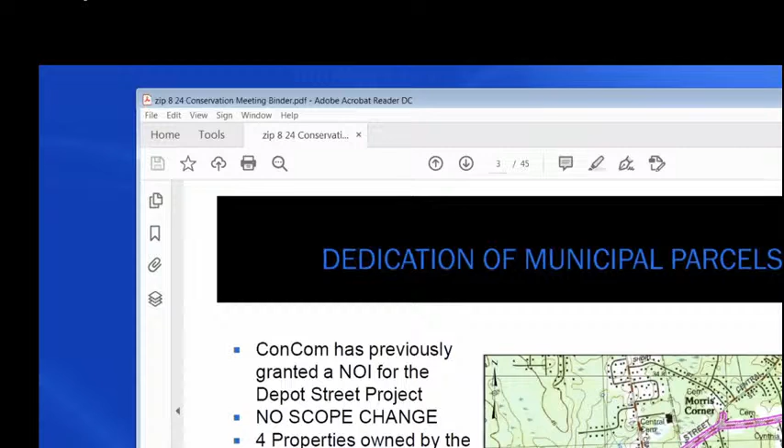The dedication of municipal parcels is our equivalent of an easement. The town can't take an easement from itself. But what we can do is the Conservation Commission is in control of 4 parcels: 288 Depot Street, 450 Depot Street, 470 Depot Street, and 9R Blackbrook Road, which are under conservation control. They're owned by the town, but controlled by the Conservation Commission. And all we're asking Concom tonight is to vote to allow Andrea to sign the dedication of municipal parcels so we can get this recorded at the Registry of Deeds to allow the project to go forward.

This is a requirement by Mass DOT. This is what Town Counsel recommended to fill this particular gap. There was some dispute between DOT and Town Counsel that the town can't grant itself its own easement for its own property. But what we can do is dedicate the municipal parcels. These properties only have temporary easements, except for one which has a utility going through it - it's going to go back to what it was beforehand. It's a paperwork issue for the Registry of Deeds, so we can record that we're doing the work there.

So if everyone recalls, as Greg pointed out, we issued a notice of intent, and there was some discussion of even restoration work being done on one of the properties. There's a head wall to a drainage conduit there. So I think we probably already agreed to all this work being done, and now we're just giving the town permission to do it on land that's under our management. Correct. Any comments, questions from anybody?

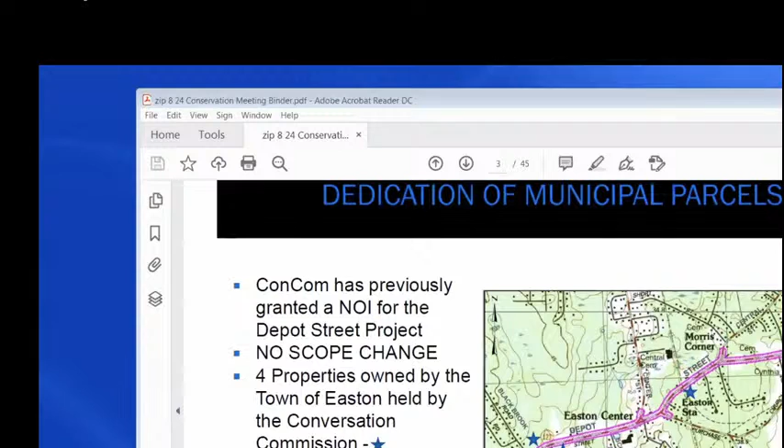Okay, I make a motion to issue - what's it called - dedication of municipal parcels as noted in the document presented in the packet. Thomas, second. Roll call vote. Kallfelz, aye. Lundeen, aye. Spadea, aye. Thomas, aye.

Just before we go on, I neglected to see if there was any public comment on this. So I do want to give people a chance. If you have a public comment, you can either post it in the Q&A section or raise your hand, and we'll give you a few moments to do that.

Okay, seeing no questions, we'll just move along here.

Greg, while we had you here, there was a discussion that's actually going to come up a little bit later in our next two hearings related to sewer easements in the Five Corners District. And there was some discussion about potentially granting you some control over normal sewer connections like the one we're doing here that are in the middle of asphalt roadway, so that you might oversee that rather than have them come before us in each individual case. Is that something you'd be open to requesting an RDA for, to cover the whole district and leave it up to your discretion - to say, well, this one's going through lawn that's right next to a pond or something, that might not be something I'm comfortable okaying - but is that something you've thought about?

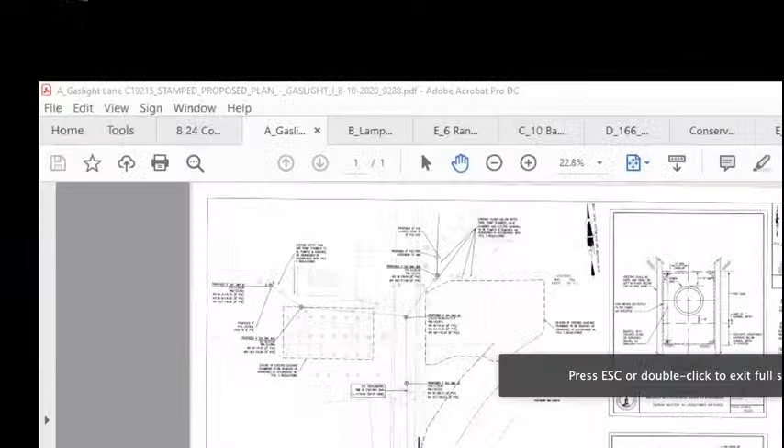Andrea, could you make me a co-host so that I can share my screen? Oh, I would love to. You are so good at that. And when I share my screen, I don't see the panel, I don't see the attendees, and I'm waiting for our favorite former chairman. Okay, I will try and keep an eye on that as well.

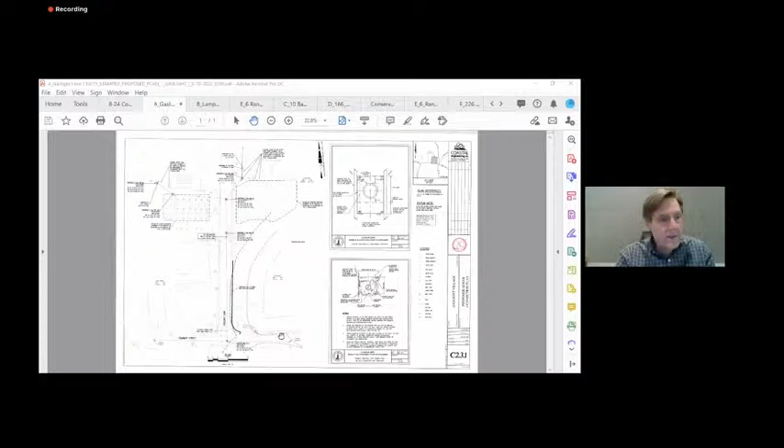Next up is 1 to 106 Gaslight Lane. This is the Gaslight Village condominium complex. Who is here for that? Please raise your hand. It's Sean Riley. Okay, I'm moving him up.

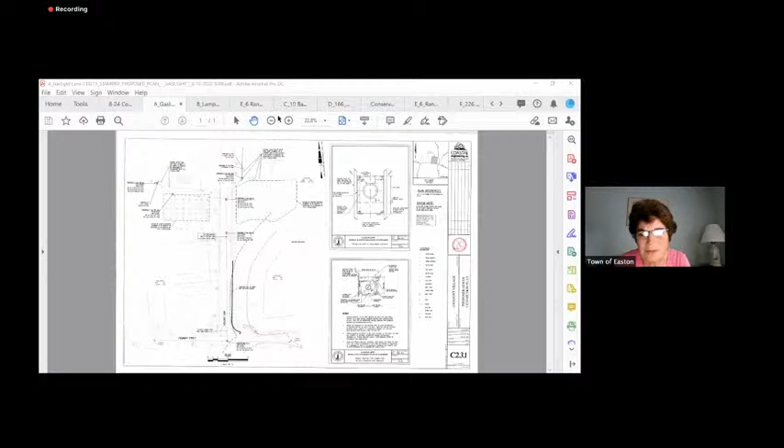Okay Sean, you're up. Oh, you're muted. Unmute yourself, Sean. There we go. Yep, all right. For the record, Sean Riley with Coastal Engineering, representing the applicant on what we feel is a pretty straightforward project.

Good segue into this. The sewer is going right down the middle of Gaslight Lane. The only real work that we're doing within any of the buffers is within the 200 feet of the riverfront for approximately the last 40 feet. You can see that we're just outside of the 100-foot buffer for the line that's running down the middle of the road. We are going to install a silt fence along the edge of the roadway. It should only take less than a week to do that section of work that runs along the buffer zone. I know you have a long agenda, so I'll open it up to any questions.

I was out at the site. It's a very level site. It does drop off the roadway about 20 feet, but by that point, it's beyond the erosion control. So I think this is a pretty straightforward approach here.

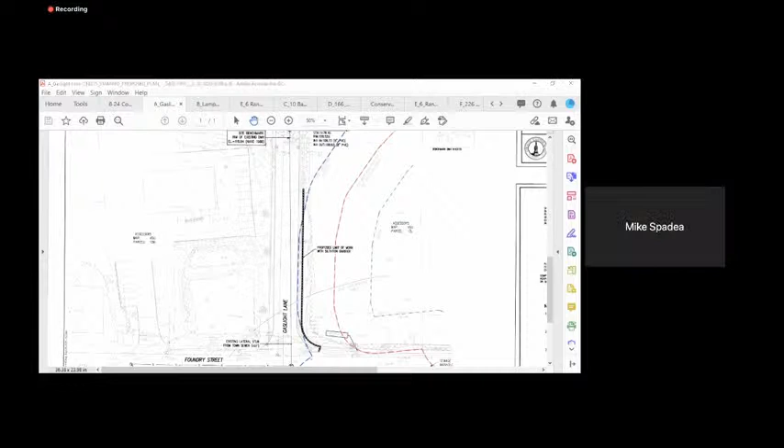Sean, this is Carol, what could go wrong? Really, if you've been down Foundry Street, they just installed the main all the way down Foundry Street, and there really isn't a whole lot that can go wrong because we're in the pavement. And it's actually curb and gutter as well, so any sediment would stay within the roadway. We're going to have some catch basin protection with silt sacks in the basins. So there really isn't a whole lot that can go wrong.

Right, and are they on a schedule of getting cleaned out, those silt sacks? Yes, they will be. And again, the process should only take a couple of weeks to do the entire project, so we don't anticipate this being open very long. Sounds good, thank you.

I just want to clarify, Sean, when you say a couple weeks for the whole project, I believe you're talking about the south side of Foundry too, is that correct? That is correct. Okay, thank you, because the minutes should reflect that this side is probably going to take a week, and then the south side maybe another week. Right.

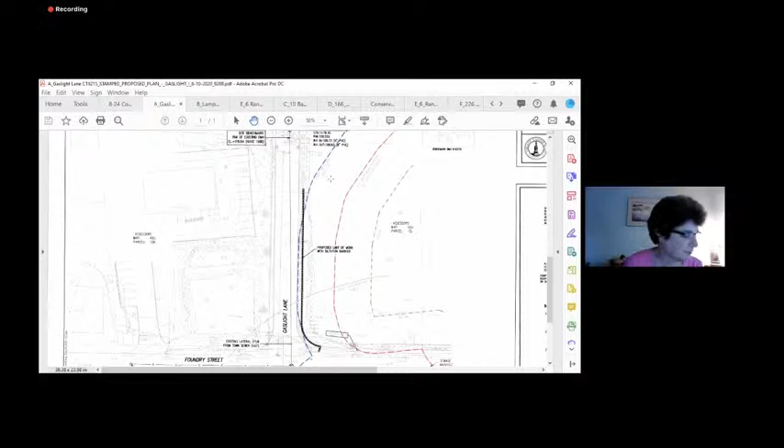Any other questions from the board? I agree, it looks straightforward to me. No comments from me either.

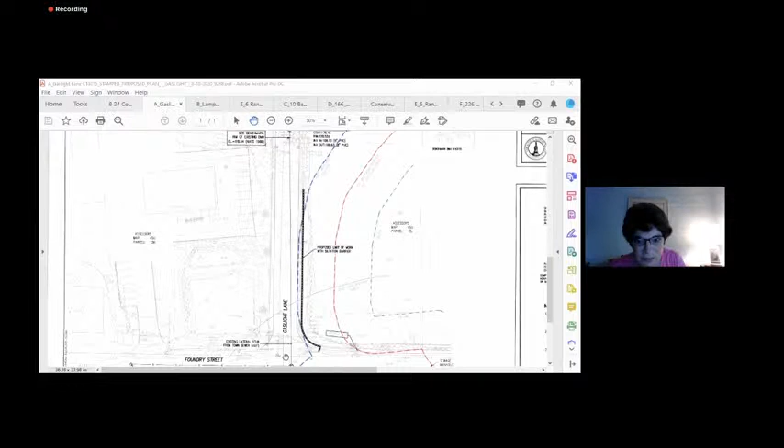Any comments from the public on 1 to 106 Gaslight Lane? Raise your hand, or if you have trouble finding how to raise your hand, send me a question. Okay, so seeing none,

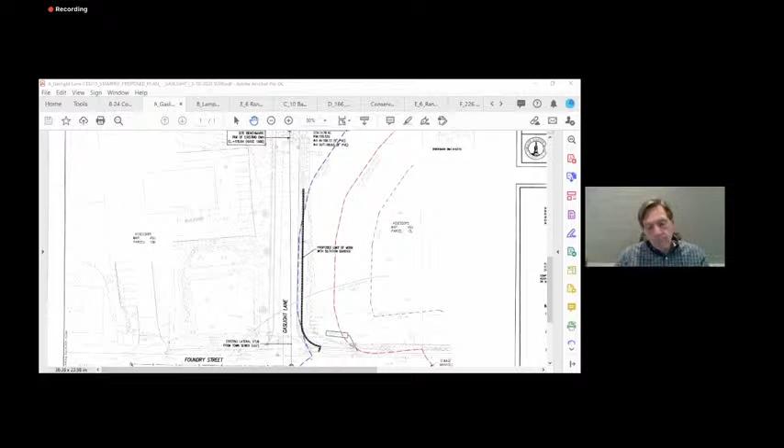I will make a motion to issue a negative RDA for 1 to 106 Gaslight Lane as proposed. Spady, a second. Roll call vote: Kallfelz, aye. Lundeen, aye. Spady, aye. Thomas, aye. Excellent.

So the next project up, is this you, Sean, as well? Yes, it is. This is 1 to 47 Lamplighter Lane. It's the development across the roadway, essentially, from the first project. So I assume we're in the same situation here. We are.

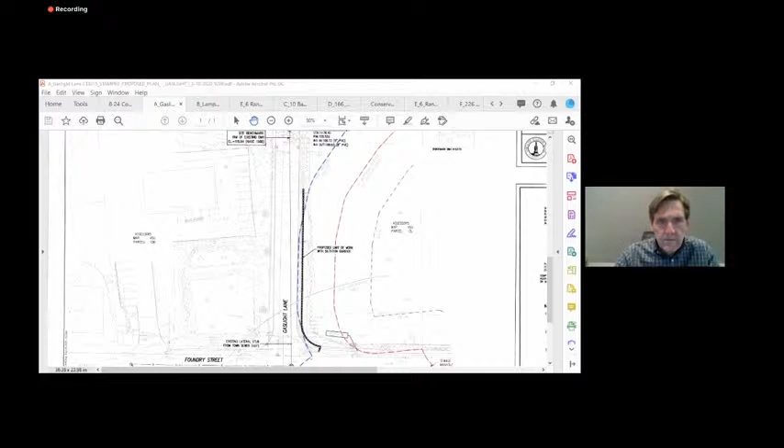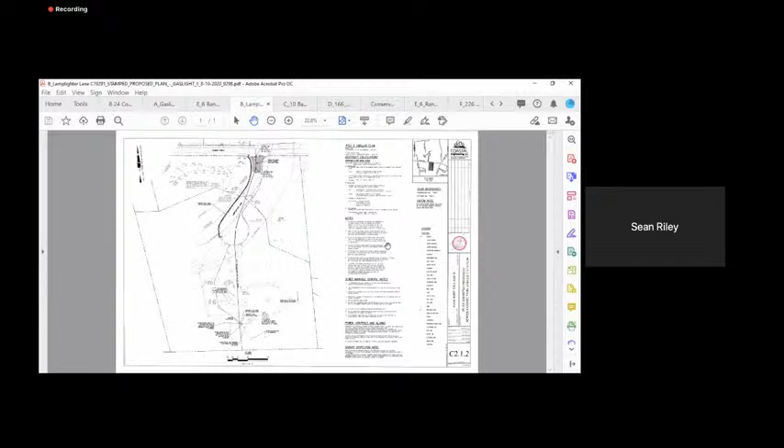Although this is a little more straightforward, in that we are proposing a lift station, and we'll be directionally drilling a 1.5-inch pipe from the lift station all the way to the termination point, which you'll see highlighted in gray at the top of the screen. That area highlighted in gray will be the area of excavation to the termination point where the force main will be directionally drilled to. There'll be a sewer manhole installed, and then the final connection out to Foundry. But the rest of the work is done underground with no open excavation.

The lift station is well outside of the buffer, and we didn't want to open everything up to lay this pipe all the way down and have to repave everything. So with only a 1.5-inch pipe, we figured we'd just directionally drill it from one end to the other.

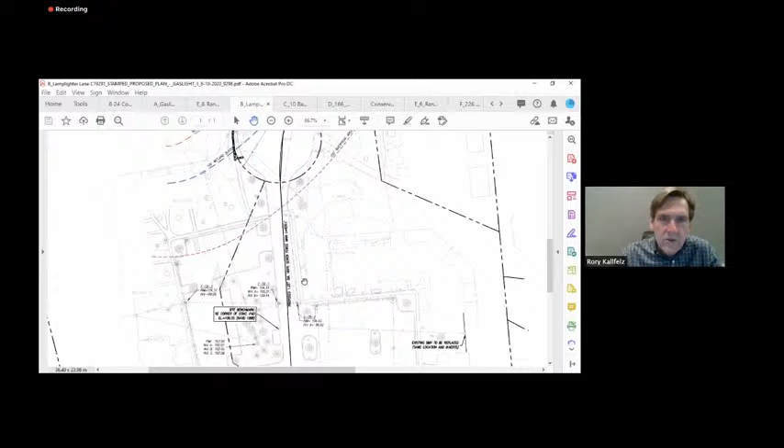So just to repeat, you're going to go all the way from the sewer inlet to the street? Yeah, all the way to that manhole. So they'll open up that area where that manhole is going. Yep, and that will be the receiving point that they'll push the directional drill through to, and then pull the pipe back through the excavation that the drill makes, all the way back to where the lift station is, down the bottom of the page.

So I'm going to anticipate Carol's question here. What could go wrong in the directional drilling, and what would you have to do to fix it at that point? Yep, so there are 4 or 5 crossings

that you see. There's catch basins a little bit lower, right in there. There's a couple catch basins with some drain pipes that we've gotten the inverts to, so we have a very good idea of where they are.

There's water crossings just below that, right? We're right below where it says Lamplighter Lane. Yeah, so we've got a crossing there, and then we've got a bit of an electric crossing, which all this is going to be dig-safed out. So those are really the only crossings we have in any proximity to the wetland resource area and the buffer zone.

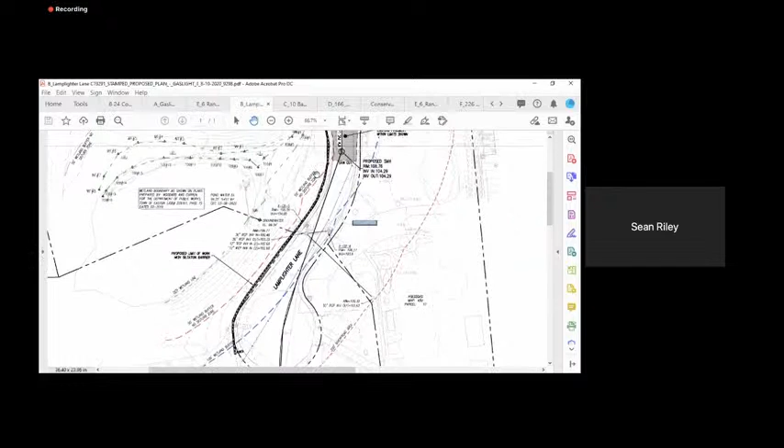Do you think you'd have to have additional erosion control, or sufficient erosion control, if you had to open up the roadway? No, we've carried the erosion control all the way down along the edge of the roadway and outside of the buffer, to accommodate any potential road openings we may need just to confirm the crossings.

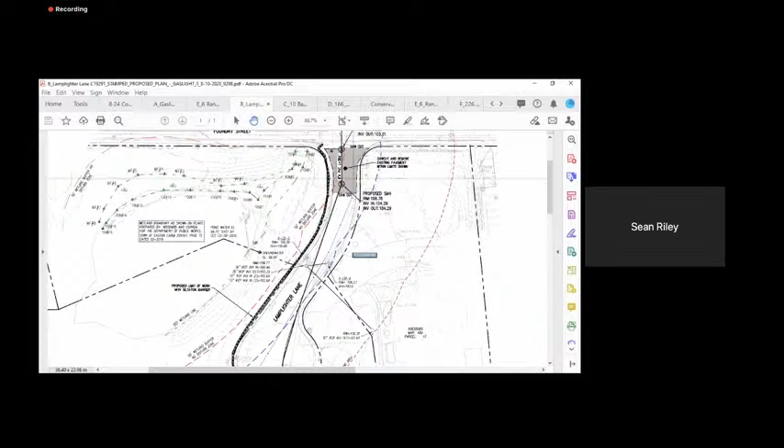So again, because it's in the roadway, I don't see that there's going to be any issues. Right, so my personal observation is, and you can see it by some of the topos here, it's relatively flat off the roadway, even into this no-disturb zone, about 10 or 15 feet. So I think with the erosion control right on the edge of the roadway, we're probably in good shape here.

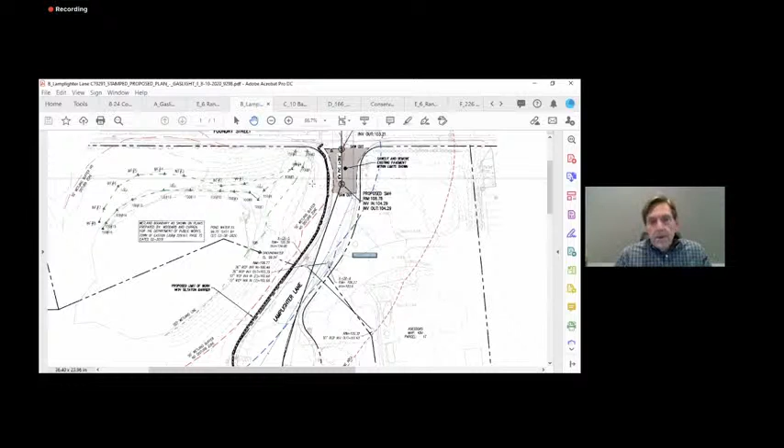Anybody on the board have any questions? Yeah, I do, this is Carol, Sean. I'm reminded the last couple of days we've had some pretty big downpours. The silt socks that are in the catch basins, do you wait until a good rain to remove those socks so you can be sure all material has washed off the road? How does that work?

So at the end of the day, they're closing up the work that they do, so really it would just be the width of the area they have open that would have any potential for silt runoff. With the timing of how long this opening would be, it's only going to be a few days that they'd have that open, and it's such a small area to maintain and oversee, so they would probably clean those out if there's any rain event.

So, okay, that sounds fine. Any other questions from the board?

I guess I have one question: when you do HDD, usually you want to do it straight, right? Yep. And it looks like we got somewhat of a bend over at the cul-de-sac. Is that correct? Yes, there is a bend, and I've already met with several contractors to see if they could accommodate that.

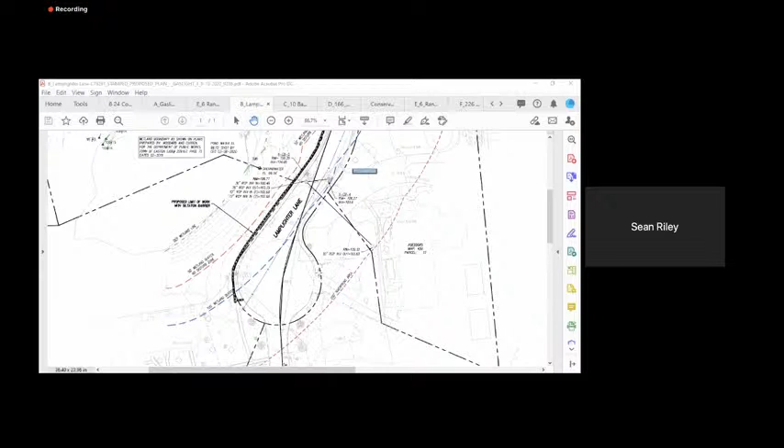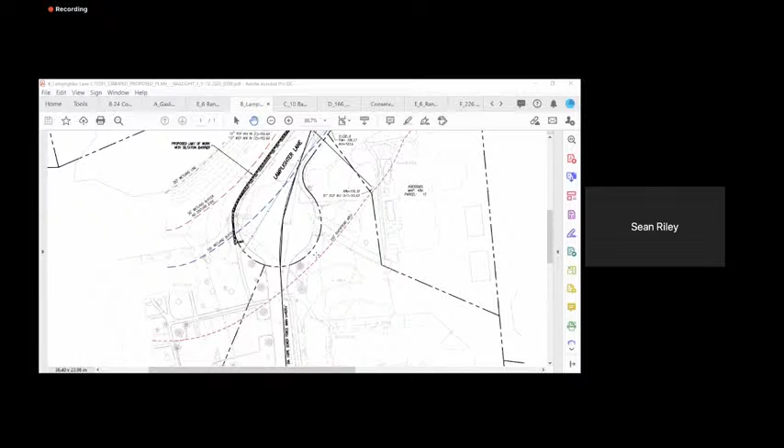Okay, and with only 1.5-inch pipe, they can bend it pretty good. Okay, and it's the flexible HDPE pipe that comes in the roll. Yep, so it's a continuous length of pipe with no fused sections.

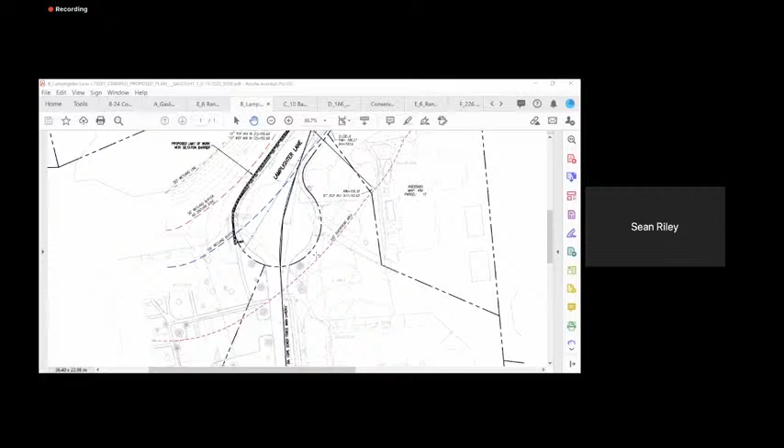Well, if they're confident they can pull it off, otherwise you might want to have a second backup plan for an entry and exit point. And if there was, it would probably be within the cul-de-sac point there. Right, that's all got erosion control. Off the side of the roadway. Yeah, that could be a contractor adjustment if they can't pull it off. Okay.

Just for the record, note that Stefan Cotino did join us in the last couple of minutes. Hey guys, sorry I'm late.

So is there any public comment? I'm sorry, any other board comment? Any public comment on 1 to 47 Lamplighter Lane? Okay, so seeing none,

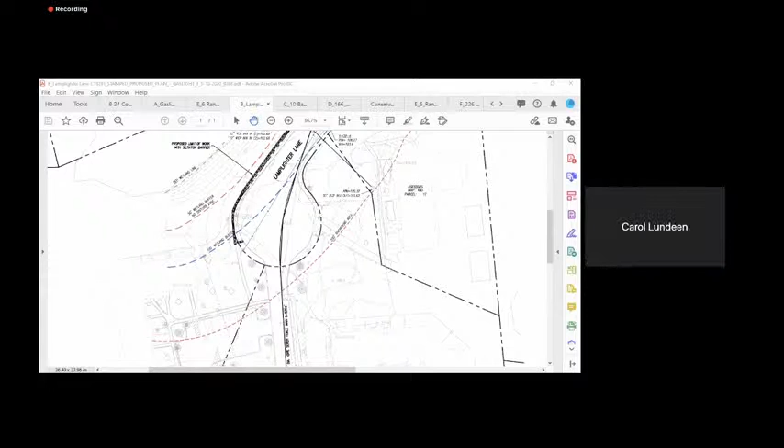I will make a motion to issue negative determination of applicability for 1 to 47 Lamplighter Lane as proposed. Thomas, second. Roll call vote: Kallfelz, aye. Lundeen, aye. Spady, aye. Thomas, aye. Cotino abstained, just because I missed the vast majority of the hearing.

Okay, all set, Sean. Thank you. Have a great night. Thank you.

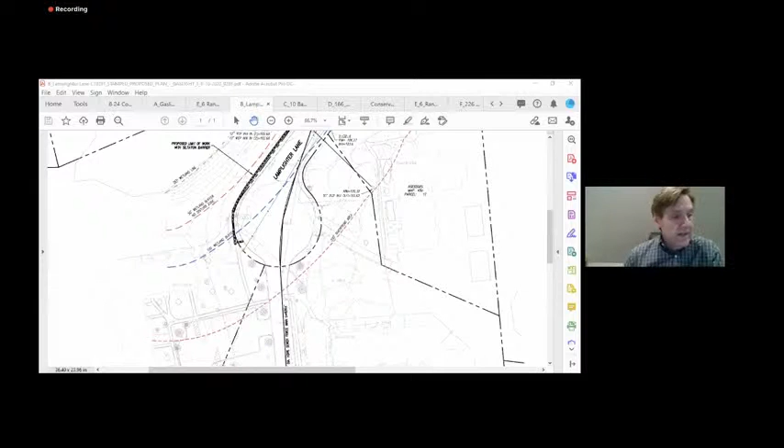Next up is a request for determination of applicability for 10 Balsam Lane. I'm promoting Dave Clenart to panelist because he's the only one I see from Collins Engineering.

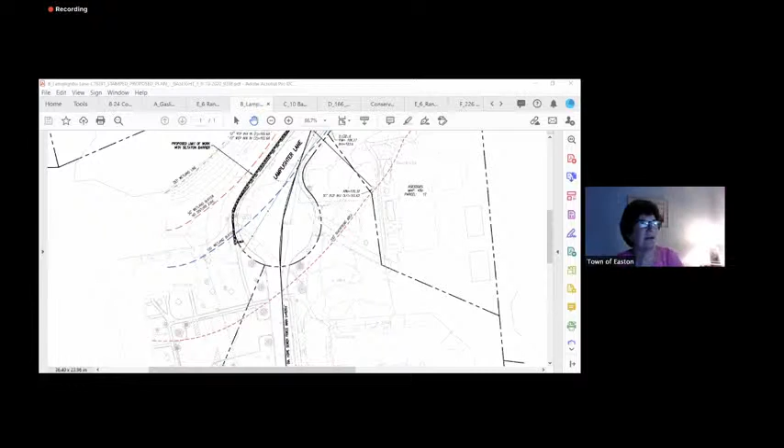Dave, can you confirm that you are here for this project? You need to unmute yourself, Dave. Yes, I'm here, thank you. Can you speak to 10 Lamplighter, or did I say 10 Balsam? Tell them Balsam? Are you here for 10 Balsam, Dave? Yes, I am. Okay great, so you're up. All right.

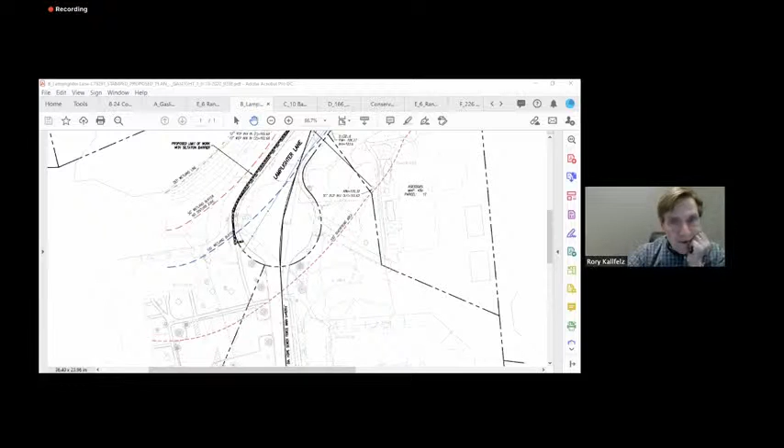I can bring up the plans here. So this is a request for a determination of applicability. This is a system that has been repaired back in 2012, and it has failed. And so...

that would work better with the soils here. The system is completely in. The wetlands are located in the southwest corner of the property, and they come up into the property. There is a 50-foot and 100-foot buffer. The 100-foot buffer is right about the house area.

The only real work that's going to be done inside the buffer zones will be the entrance and the exit for the vehicles. We do propose a silt fence that goes along the southern portion of the driveway between the driveway and the wetland line, and this will be maintained throughout construction.

The other silt fence will follow the property line up the hill around the work limit, around the septic system and back down the hill, and then over the corner. So it will essentially be enclosed.

All the mechanisms for the septic system are in, and so the only thing that will be replaced is the field, which is quite a ways outside the 100-foot buffer.

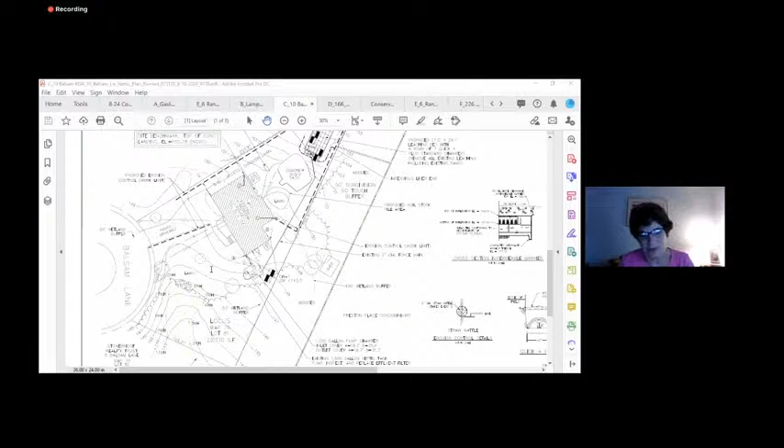And then if the commission has not been out to the site, the debris is off of Balsam Lane heading down the slope into the wetland. It's unfortunate that it's on this person's property. It may or may not have been this landowner, but it's his property. So I just wanted to point that out. Thanks. Yep.

Any public comment on 10 Balsam Lane? Either send in a Q&A or raise your hand. Okay, so seeing none.

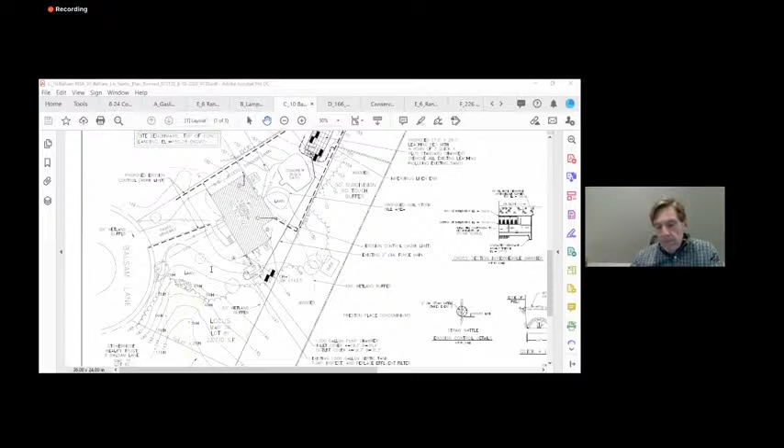I would make a motion to issue a negative determination of applicability as proposed, just noting that the applicant has acknowledged that there is an outstanding order of conditions from the 2012 project. Contino, second. Roll call vote.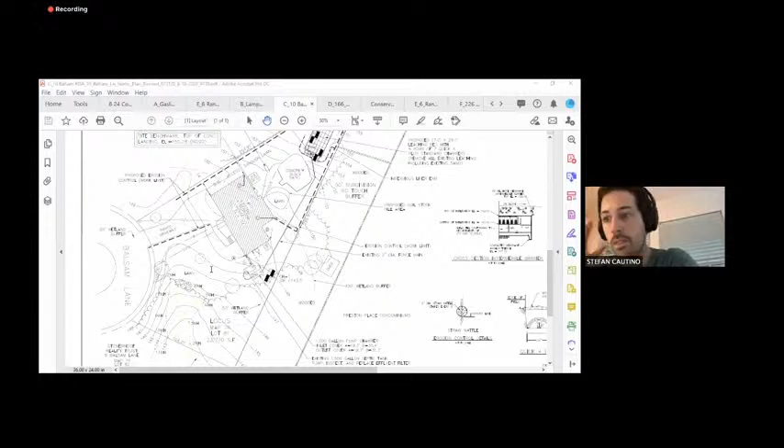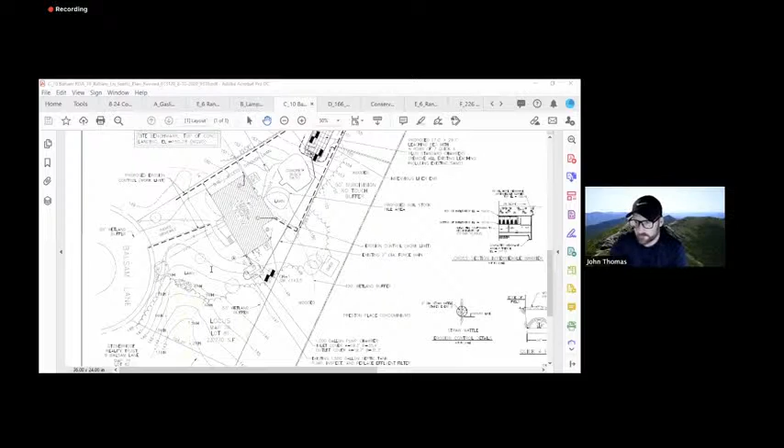Caulfield's aye. Lundeen, aye. Spady, aye. Thomas, aye. Cautino, aye. Okay. All right. Thank you, everybody. Thanks, Dave. Thank you.

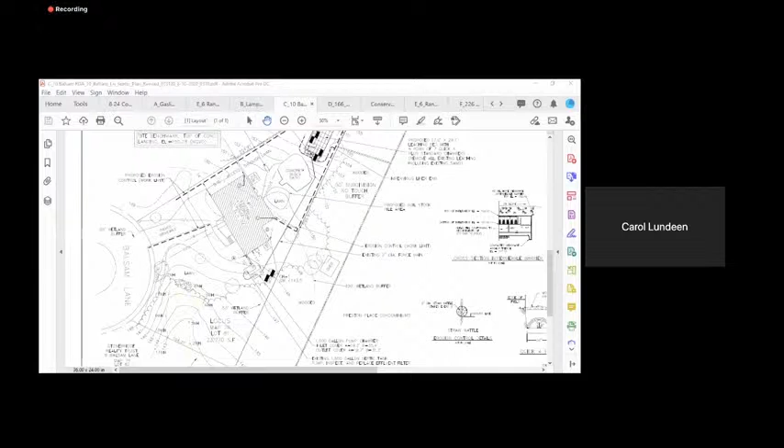Okay, so next up is 166 Massapoag Ave. This is a notice of intent for a septic repair. I actually don't see Driscoll Engineering. Can anybody identify themselves as the project representative?

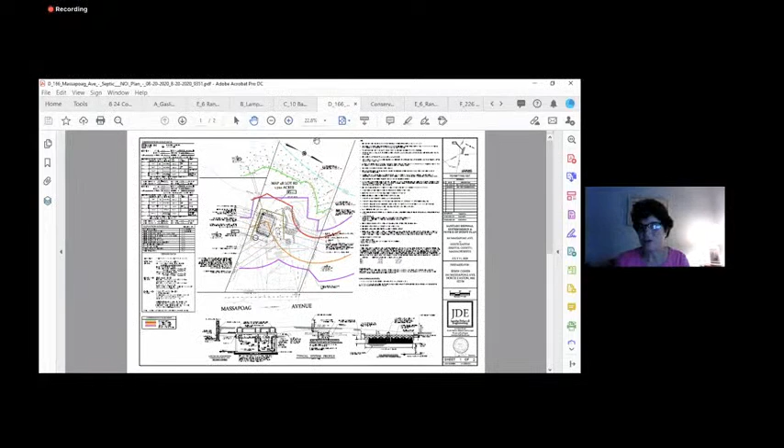Patrick, thank you. Okay. Patrick is coming on as a panelist. I don't know who Patrick is. I'm sure he'll give you his full name. Okay, Patrick, you just got to unmute yourself. Okay, here we go.

Good evening. Good evening. How are you? Good. How are you all doing? Good. Do you want control of the screen? You want me to do it, or what do you want? No, you can do it. My laptop's a little slow. Okay, your project is up on the screen now. Yep, so I got it.

Okay, so this is a septic system repair at 166 Massapoag Ave. As you can see on the plan, we have a couple of resource areas out in the back. We have a bordering vegetated wetland. We have a certified vernal pool within the wetland, and we also have a flood zone, which is within the vernal pool and the wetland.

We've designed the system in the rear yard, which is mostly existing lawn area. The trees and brush that will be removed are mostly rhododendrons that were planted by the homeowner. So we've got a combination septic tank and pump chamber to try to limit the amount of disturbance behind the house, and that'll pump over into a bed of

ARC 36 leaching chambers. We're surrounding 3 sides of the system with a poly barrier in order to reduce the slope and the grading required for covering to meet breakout. We have the work area surrounded with erosion control barrier. We also have a dewatering basin shown in case they need it, which they shouldn't this time of year. And that's really the basics of the plan.

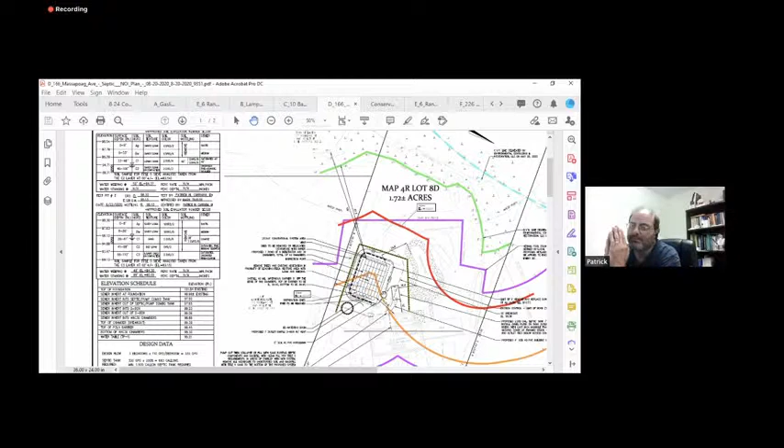So where's the existing system? Right in the backyard where we're putting the new system, more or less. It was an old pipe and stone leaching field, and it was hydraulically failed, but it was also in the groundwater table.

Okay, any questions from the commission? Sure, this is Carol. I think you're reading my mind. Given the critical nature of the environment near the site, I wonder if this might be an opportunity—I don't want to ruffle feathers or get into a policy discussion with the Board of Health—but maybe this is an opportunity to put in a better system, a kind of self-enclosed water treatment plant that releases less nitrogen than a typical Title V unit would. Yeah Carol, I back that too, I was just thinking we should definitely look into that.

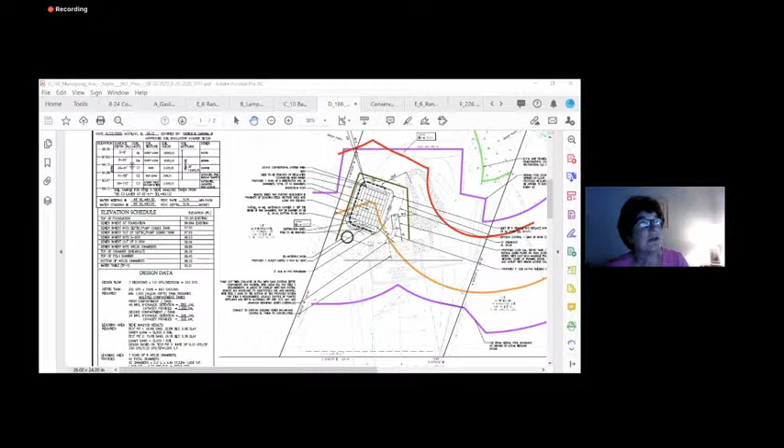So remind me of the resources here again. Certified vernal pool, bordering vegetated wetland, Canoe River ACEC. I'd also like to remind the commission of your policy on simplified septic system repairs, maximum extent practicable when it's an upgrade.

Right, so I think the difference between this and the one time we did that was it was new construction. I think we're following our own guidelines. And once again, if we were to go down this road, we'd have to issue new simplified guidelines and create exceptions for some of these things, if that's what we want to do. As I've said before, my own opinion is we'll have to do this in conjunction with the Board of Health to be sure.

But I think, given that it meets the standards for the simplified septic repair NOIs, I'm inclined to move forward as designed, acknowledging that I understand the concern. Yeah, I have to agree with Rory. This is Commissioner Cautino—while we do have some precious resources in the area, the current simplified septic system in place has to kind of rule the day here. It'd be great to see guidelines developed around those low-nitrogen systems, because I think they can be great where they can be used.

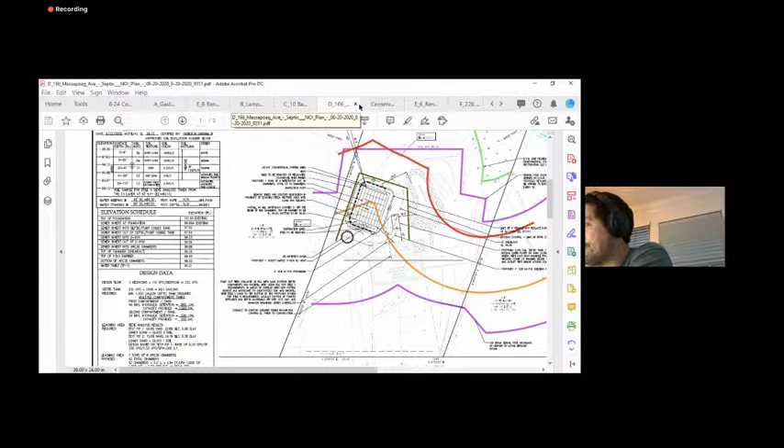I guess I'm leaning more towards Rory and Stefan here too, because it's going to be a replacement of an existing system with an existing lawn. So when it comes to those kinds of things, I'd lean towards retrofitting or upgrading whatever was there previously, making it a better system overall—an improvement.

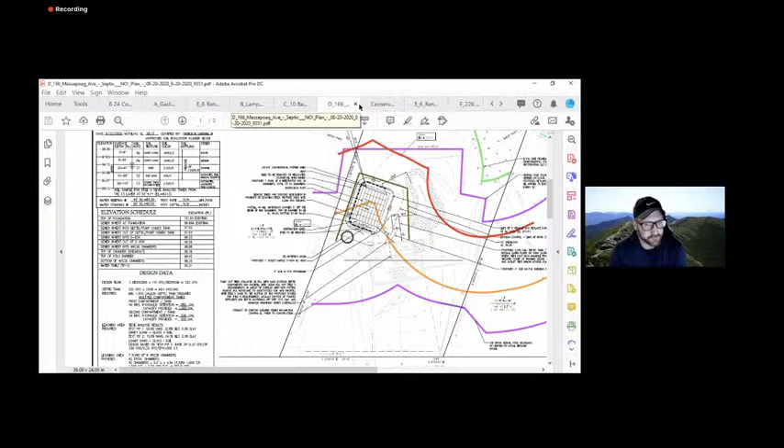Yeah, right, no question, there's already... this is a better system than what's there. No question about that. So I do agree, and Carol, if we ever get the chance, that's probably something we should target getting onto somebody's agenda. It's just a very difficult time to try and do that remotely. But I do agree that has a lot of value given all the areas within town subject to these very sensitive impacts. So I'm inclined to move forward as is.

Is there any public comment on 166 Massapoag?

By the way, I've had a couple of conversations this week with Andrea, and she said Massapoag correctly every single time I talked to her. So.

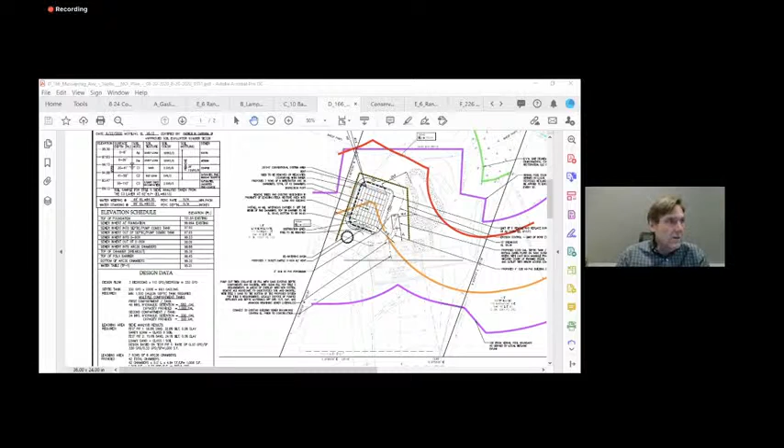Okay, so I'd like to make a motion to issue a permit for work and order of conditions for 166 Massapoag. The one thing, please note, you need to require that the landscape debris behind the fence line be removed. There's actually two different piles - there's landscape debris and then there's this other pile that's got some drawers from a dresser in it, so I don't know if I'm going to call that landscape debris. So all debris outside the fence line is to be removed, and no further dumping in the wetlands will be identified as a perpetual condition. And obviously you already spoke about the permanent markers being located on the fence, so.

Catino, second. Okay, roll call vote: Caulfield, aye. Lundin, abstain. Beatty, aye. Thomas, aye. Catino, aye. Okay, so it's a 4-0-1. Thank you. Great, thank you very much. Thank you very much.

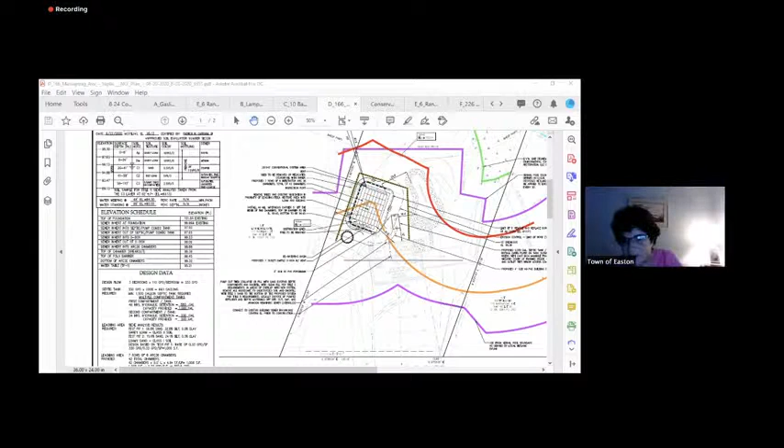Next up is 6 Randall Farm Drive. I'm going to bring Laura up to a panelist. She can talk about her project. And you have to unmute yourself. There you go. Hi, how are you?

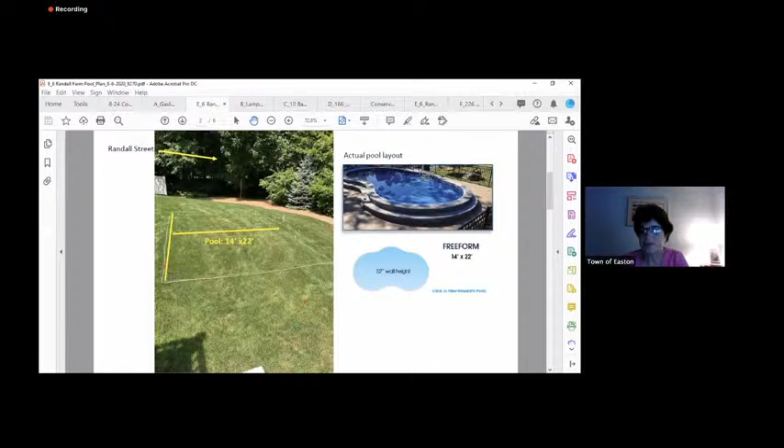Good, thank you. So, welcome tonight. Being you're not an engineer, we'll take it a little bit easy on you. Thank you. We'll help you through this. Great. So this is a notice of intent for an above ground pool, and there's a small deck to go around, I think, 3 sides of the pool as well. Yes, from my understanding.

The resource area on this, there's a stream behind the property that also has an associated bordering vegetated wetland. It's probably about 25 feet off of the landscape portion of the property, which you can see here in this picture. To the right you can see where it starts to slope off down into the BVW. This is from observation from Andrea and myself being out in the field. So the disturbance here is probably pushing up against the 50-foot buffer zone on this property.

The intent is to also have a fence, obviously required by town regulation, around the pool. I think the intent is to have it extend around 3 sides of the backyard and give them a little bit of room around it. So that's a very high level understanding of what I have about the pool.

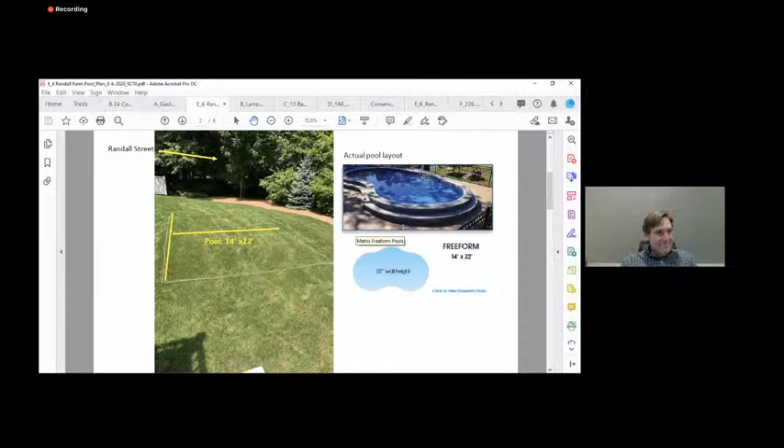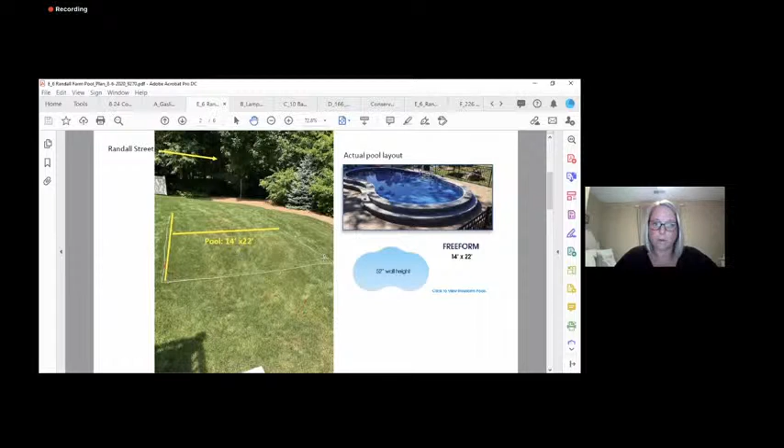So I don't know if you want to tell us anything else, Laura? Yeah, I mean, I think there's some flexibility in terms of the fence, and if the fence is potentially getting too close to that area, there's probably some other options we could do in terms of having the fence just around the pool versus making it kind of around part of the yard. And we would be looking to do a saltwater filtration system. And yes, I think you're correct in terms of the deck on 3 sides - mainly 2, and then the little stairway up to the pool. Right.

I think the other thing, from our concern, is we'd want to see some sort of gravel splash pad to allow for any water that gets out of the pool to be caught right there and not drain off anywhere. The backyard is relatively level, as you can see there. There's a couple feet of slope, but it doesn't really slope off until you get off the landscape portion of the property.

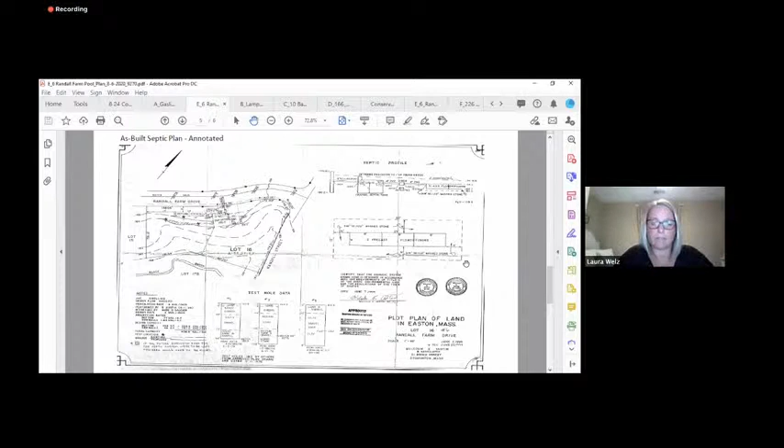So I did actually upload, very last minute, some information in terms of the waiver and what we would do for mitigation. I did add in there that we would put the gravel underneath the deck as a splash guard. Right, I did see that. I actually have it here.

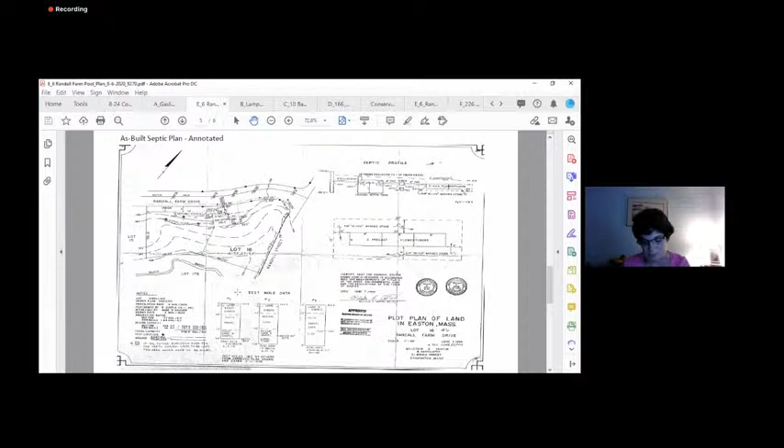Go ahead. While he's looking for that, I just want to note that the as-built plan from the late 90s showed a brook line 90 feet away from the property line, and did not acknowledge that there was an extensive wetland along that. So it's that wetland line that Rory and I are talking about, that's within 10 to 25 feet off of the native vegetation. But it's roughly 45 feet or so from where the fence line will be, inside the lawn where the pool is.

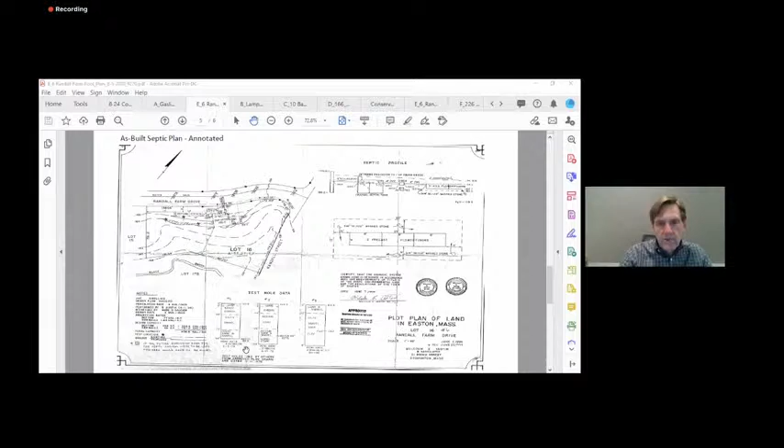The waiver that was submitted - if anybody hasn't had a chance to view it, I can stop this share and start a new one. There are some alternatives as far as placement of the fence. She is opting to go with a saltwater pool filtration, and she wants to install the gravel under the deck as a splash guard, and she's committing to replace any plants in the event of damage due to a breach in the pool structure. As for public interest, there are some invasive plants in the perimeter of the lawn line - she's looking to manage those invasive plants, and even if necessary, replace some native plants if required to control them.

So in general, I'm in favor of this project. I think the applicant has probably given us a good solution here, and is trying to be a good steward of the environment at the same time, being able to utilize their backyard for recreation in a manner consistent. So.

Anybody have any questions?

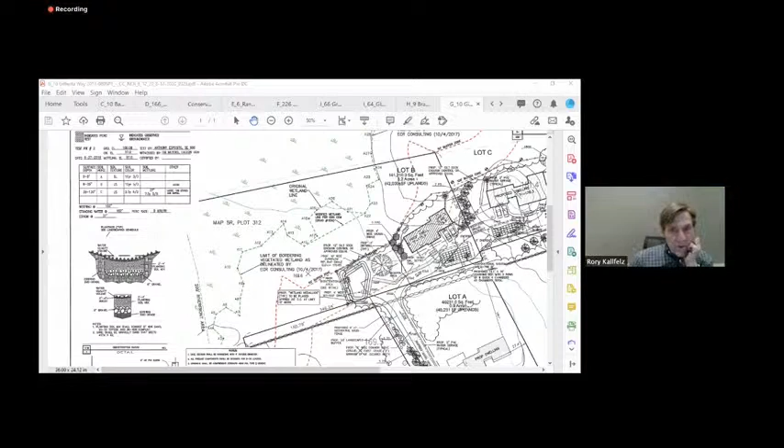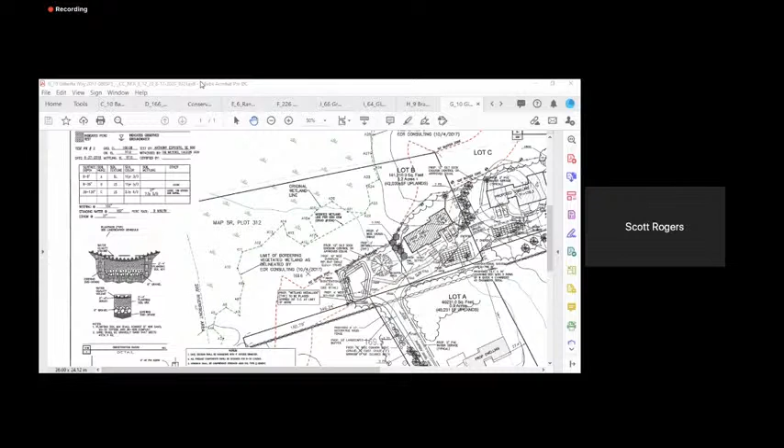So go ahead, Scott, sorry. So 174.9 is the garage slab elevation. The house is a foot above that — finished floor or top of foundation is a foot above that. We also took a look at the bioretention area we had talked about last hearing, and to demonstrate the pre-development and post-development peak runoff rates, we put together a chart for the existing 2-year, 10-year, 25, and 100-year storms, compared to the proposed condition. There was a pretty significant decrease for all 4 storm events. We've also shown the snow storage area at the end of the drive, on Lot C, which was cut off on the last plan you guys saw. We also took a peek at the lawn maintenance guidelines that were provided — we made some modifications, but it's essentially very similar to what was provided to us, and that was included with the resubmission.

In regards to topography, originally we had used an assumed benchmark of elevation 100. We went back and converted those elevations to NAVD 88, which was the same elevation as the FEMA flood cert, and also the same elevation used for the dam elevation for Kingsley Road. So now everything's on the same datum, and it all makes sense as opposed to being off by 100 feet or 70, whatever the number was before. And then lastly, we added in the rest of the trees proposed on the project into the plan and the landscape schedule, so you can see what was proposed for those as well.

So with that, I'd like to answer any questions you guys may have.

I think you did hear us loud and clear, Scott, and I appreciate the efforts you put in. The one that was most telling for me was the stormwater conditions pre and post development actually being improved post development, and the calculations you did there. I think that's very helpful in this situation, and it's what we were hoping the design of these homes could achieve, because it's a very sensitive issue. I appreciate you putting together the calculations that support that — I think that's a very positive thing, and I think you've given us all the other information we asked for from my perspective.

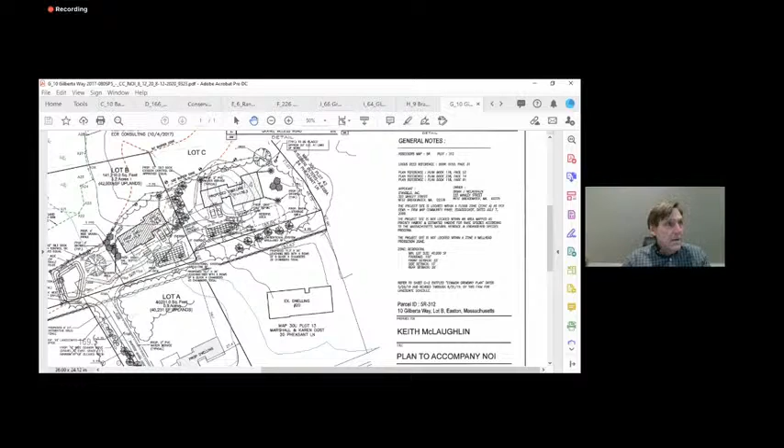So any other commissioners want to make a comment or question? Sure, Scott, this is Carol Lundeen. How are you tonight? Hi Carol, how are you? Good. So this project has quite a few documents at the permit office — it's a little confusing keeping track of them.

Some may feel it's not that fair to bring up certain kinds of questions at this point. But what really wouldn't be fair would be to improperly implement the regulations.

So just to get our heads around where we're at, I'd like to ask you, first of all, I want to be sure we're doing things by the book, and I'd like to ask you some questions.

Sure. And also, my impression is that you're a big fan of single-family homes and not at all a big fan of Easton's regulations. Is that right? I wouldn't say that, no. Well, there was some comment you made last time that was a little... So Carol, I never had that issue with Scott, so I'm not quite sure where that's coming from. Sorry, I was just looking for a little levity.

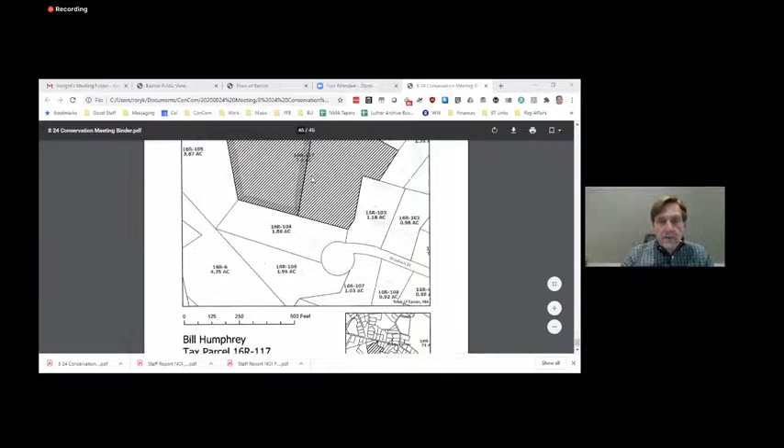So that has been reviewed by town counsel, and I believe we're ready to sign off on this and submit it to the select board to accept it. Does anybody have any questions about it? Or shall we take a vote to accept it?

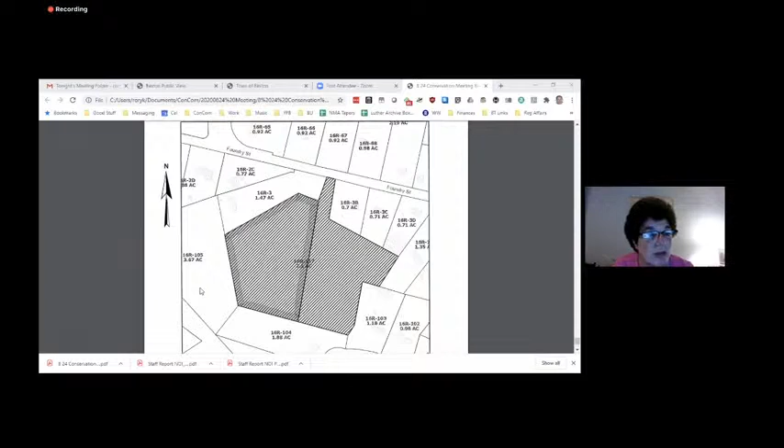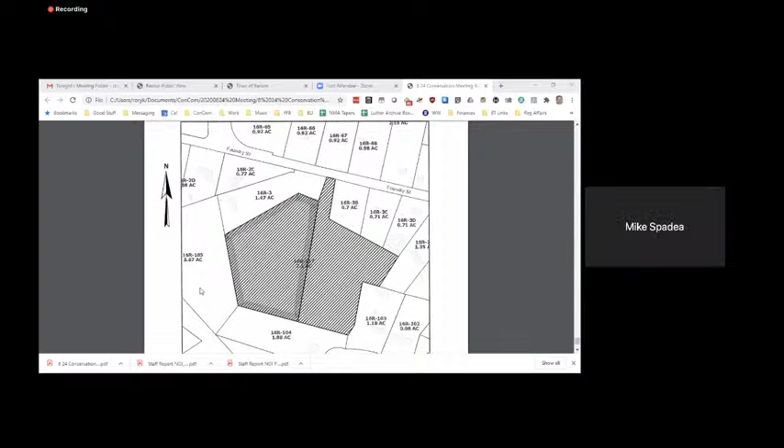If I could just add, for those of you that weren't here at the time, the parcel immediately to the west, 16R105, is owned by the town Conservation Commission. Then there's the utility line of National Grid, and the next parcel to the west is Mass Fish and Game. It's the Hockomock. We're in the Hockomock Swamp ACEC, and so this expands the undeveloped land associated with the Hockomock Swamp Wildlife Management Area. This is a connection through already undeveloped land, so it's an excellent opportunity for us to add 3.7 acres into inventory. Contiguous parcels are always nice. Yes, it also has a vernal pool on it that's likely to be certified.

Ooh, very nice. Great.

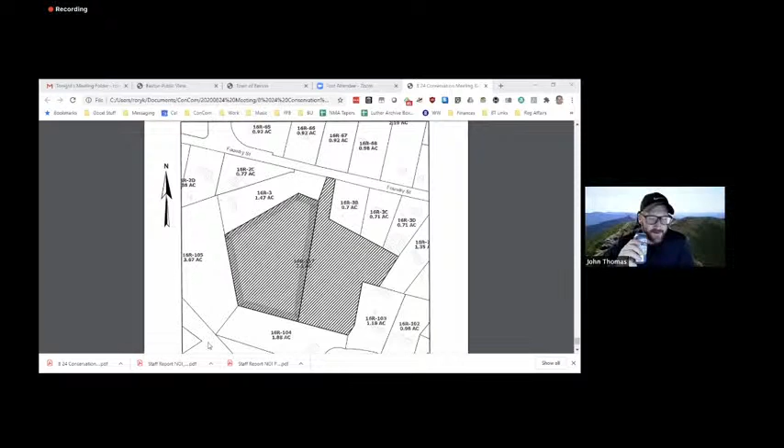So I will, if there's any public comment on this, I'm happy to take it. Seeing none, I make a motion to accept the land donation of parcel A, 348 Foundry Street.

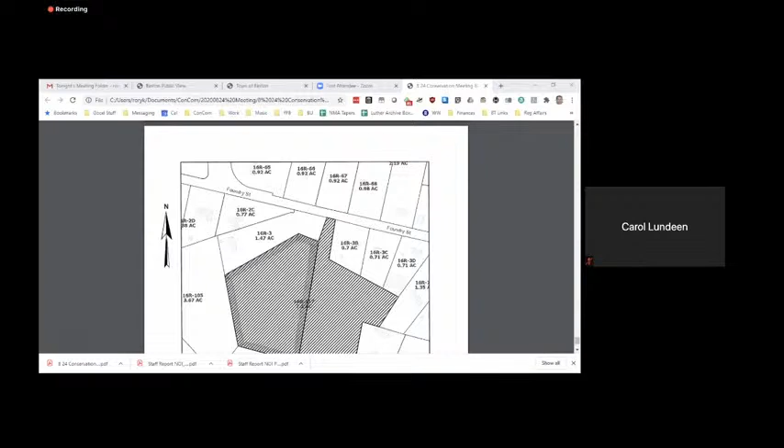Thomas second. Roll call vote. Caldwell's aye. Lundeen, aye. Spady, aye. Thomas, aye. Catino.

Stefan, you there? Okay, although I guess my connection's bad. There you go, yeah. You got a Catino aye on that? Can you hear me? It's off and on. Catino, aye, can you hear me? Yeah, that one we got. You got it. That's official, 5-0, it's in the book. Persistence pays off.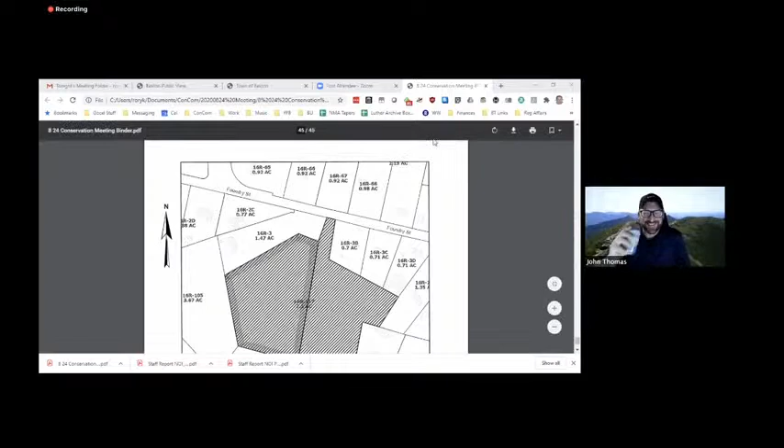I think my headset died on me or something.

Okay, so now we can go to 9 Bradford Street. This is the full certificate of compliance for 9 Bradford Street, which is a single-family home.

And as Andrea alluded to, what was left on this was they needed to seed and loam the lawn, and they were waiting to submit there were 2 vernal pools on this property, potential vernal pools that have been submitted to the state for approval. They haven't gotten to it yet, but it has been submitted, so they met their burden, and the land donation here as well. I believe everything is in order now.

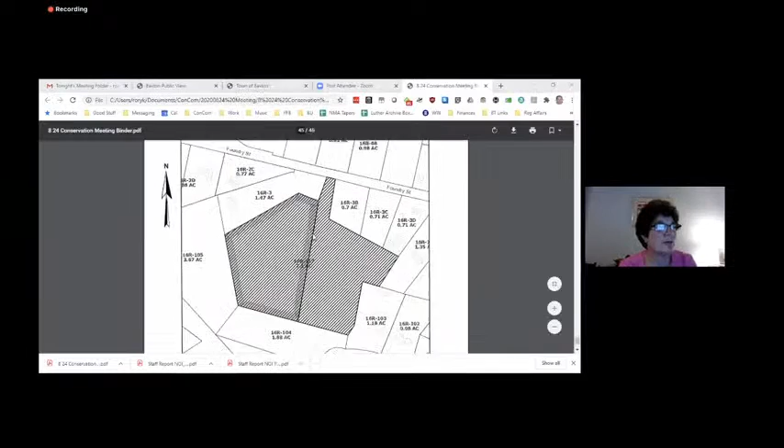We should issue a certificate of compliance. Anybody have any questions? There were 4 perpetual conditions, which you can see identified in the staff report: maintaining the fence and permanent markers, maintaining pavement and lawn with sustainable practices, prohibiting use of road salts, and removing any debris material in wetlands. It's page 16. Big scroll is going on right now.

So, any public comment on 9 Bradford? Any commission comment on 9 Bradford? Any public comment on 9 Bradford? Seeing none, make a motion to issue a certificate of compliance to 9 Bradford, noting the perpetual conditions in the staff report: maintain fence and permanent markers, maintain pavement and lawn with sustainable practices, prohibit use of road salts, and remove any debris material.

I'm a second. Roll call. Caulfield's aye. Carol, you muted? Lundeen, aye. Spady, aye. Thomas, aye. Cautino, aye. Thank you.

64 Gilmore. 64 Gilmore is a septic repair that you approved in June of this year. It was done under an emergency certification. It began before the order was issued because of failure. I've inspected the property last week, and the markers are installed, the grass stabilizes the work area, and the perpetual condition is no dumping in the wetlands.

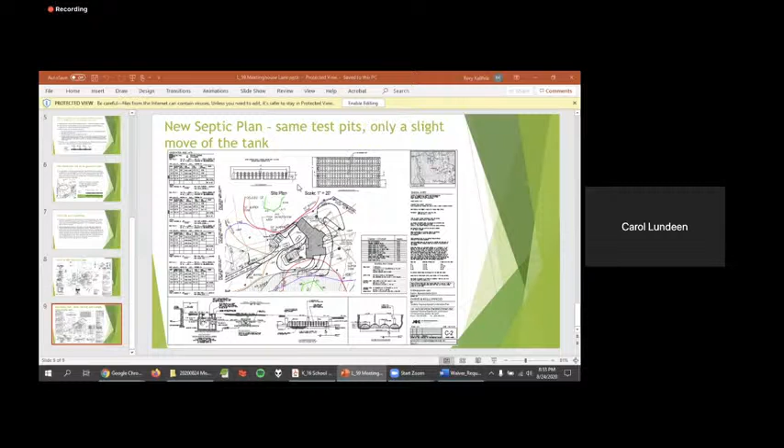There's some, I can bring it up. Can you see it now? Yes. So there's a presentation that wasn't in your packet. There is some discussion about, is the applicant here tonight? Do we know? I don't see them, no.

So they did decrease the footprint of the house by 25%, and they decreased the amount of driveway, even though they're changing it to asphalt. They're also giving back and proposing to put about 8,000 square feet back into natural vegetation that was indicated on the original plan as lawn. Additionally, they're in consideration of putting in asphalt. They are looking to put in some swales and a bioretention basin to treat the runoff from the driveway. Is that about it, Andrea? Did I catch it all? That is it.

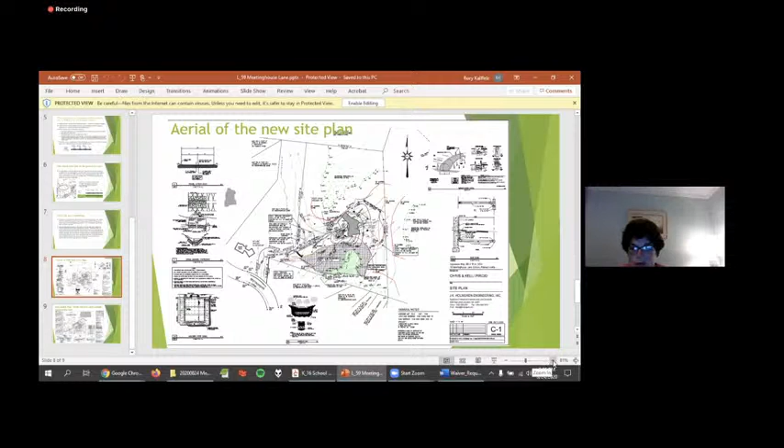So the next page shows - no, page 37, go down two, I guess. So on this page, hard to see, the driveway is a lot less circuitous. It's much straighter - a straighter shot in, which is what we were asking at the time.

And then if you go to the next one, here's the limit of work line, the purple line. That was what was approved as the limit of work, both north and south of the project. He stayed within the limit of work, but he pushed his house closer to the street line to shorten his driveway. You can almost see the gray older house, much bigger house, behind it. He now only has about 4 feet on his northern side to the limit of work. But he's designing it so that there's really going to be no walking around on that side of the property - it's really on this side.

That's a garage, so you would walk through the garage instead of walking around it. So the question before you today is, since the limit of work is maintained, since the impervious area is actually less than it was, is this an administrative minor modification, or do you want him to come in for a full evaluation through an amended notice of intent? An amended notice of intent means you only look at that which has changed, but you have the full public hearing, legal notice, abutter notifications. Clearly he'd prefer the minor mod, and tried to respect that which he thought you'd be most sensitive to.

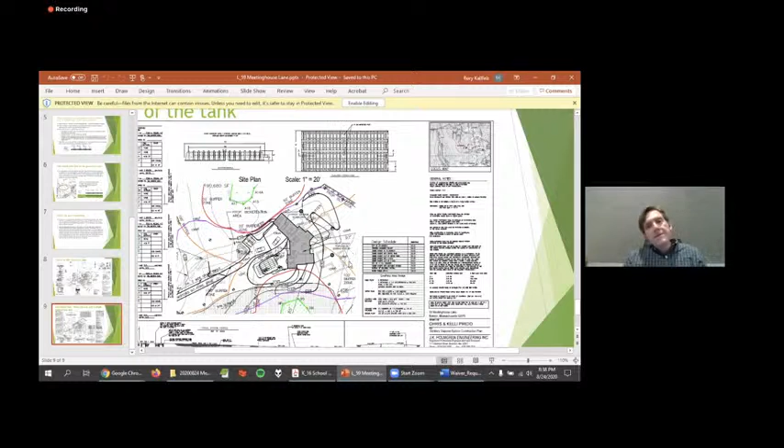So this is all preliminary - this wasn't built, is that correct? Yeah, this isn't built at all, right? Okay, he can't come in for a foundation permit. When you come in for a foundation permit, you have to show the full house. Right, so he wanted to get the Conservation Commission's feedback before he asked for a building permit.

My only hesitation is this is most certainly not a minor modification. I think I agree with you, Rory, in that I'm in favor of it, but we'll be setting precedent for pretty major modifications to slide in under a minor modification, guys. Well, what I used as criteria is: you kept the limit of work, your impervious area hasn't increased, it's decreased, you've respected all the conditions, and he moved it in all the ways you asked the other guy to do in the hearing, and he wouldn't do.

No, I totally get all that. I'm just raising the concern about it. I mean, this is certainly not minor - it's a pretty radical change. It's a radical change in the positive, I think.

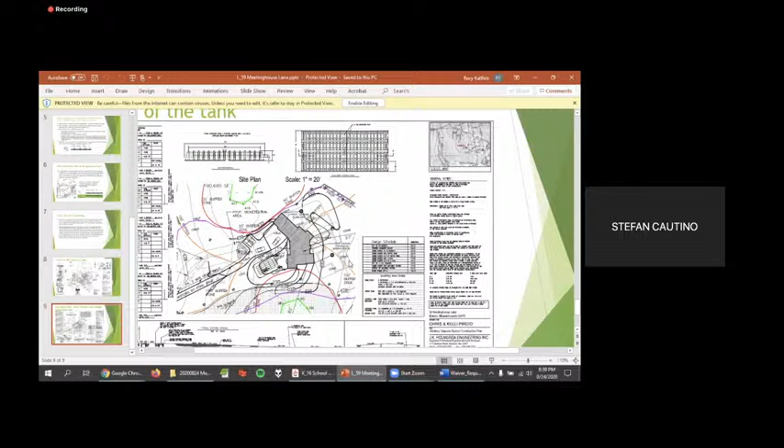Yeah, I remember working on a project where the applicant came in with something similar - a smaller footprint and less impacts to wetland crossing - and they wanted to treat it like a minor modification, and the commission wouldn't allow it. They said they have to refile. And you agree with that? It's not something I agree with. I mean, it's all up to opinion on whether you think it constitutes a minor modification. When I look at things, if the footprint's decreasing, that's a net benefit to permitting projects and us conforming and administering the rules and protection that's within our purview and jurisdiction.

You know, it's just at your kind of discretion as how you perceive that.

Yours being the commission, how does the commission feel towards this? Is it a net benefit? It looks like they're going to be closer to the 50-foot setback for both wings of the house versus being within the 75 to 100-foot buffer.

You got to weigh what the overall aspect of this whole project is. If he proposed it all the way to the east, further outside the buffer zone, I think this would be more acceptable, in my opinion. You're getting further away from our jurisdiction.

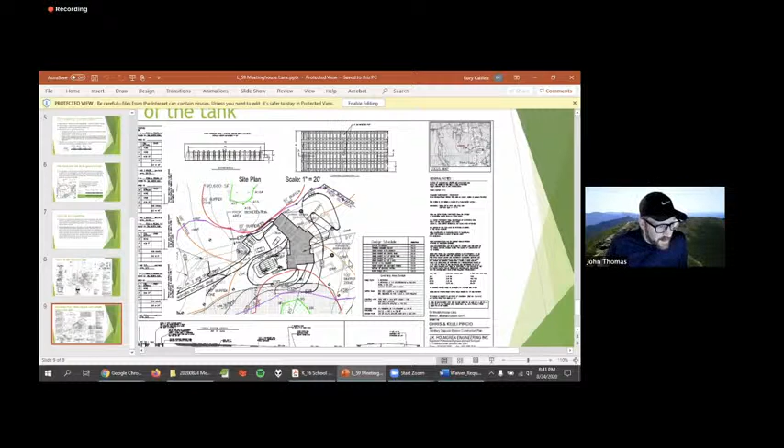There's a wetland to the west, and if north is up, there's a wetland to the east. So farther back, I guess where 97 is, that's where the angle point comes in. You can see it here. Oh, right there. Okay.

If he could position it within that kind of box there, I don't know what the conditions are with trees and whatnot. I don't know if this whole area is forested. There's a big drop there. You remember the contours, obviously.

Sean and Rory kept it at the top of the slope instead of into that gravel pit. That was so there'd be less additional grading. If that's the most acute point where you could position it for development, then that's probably the better place for it, based on less grading potential.

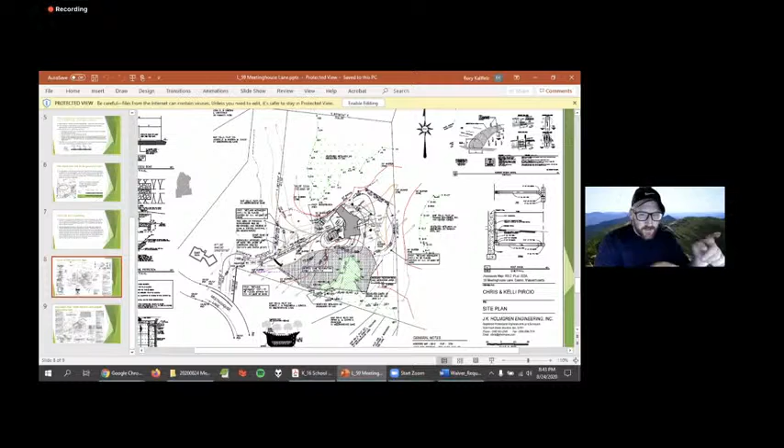Rory, I think you're right, I think they're going to need an amendment. Yeah, that was going to be my next question. If it's not a minor mod, what's the next simplest road to take this?

He has an amendment option, so basically he gambled. He's got a 6-week window now to do permitting. He's got to come in for a legal ad and a public hearing. The way a normal notice of intent is done, an amendment is done through the same process—you just have a narrower focus of what it is you're reviewing.

So can I ask a procedural question here—who's eligible to vote on an amendment? The vote's tonight. If when he comes back in, we can make the recommendation tonight that we want this to come in as an amendment. It comes in as a new hearing, so whoever's present that night. That was my question, so you answered it.

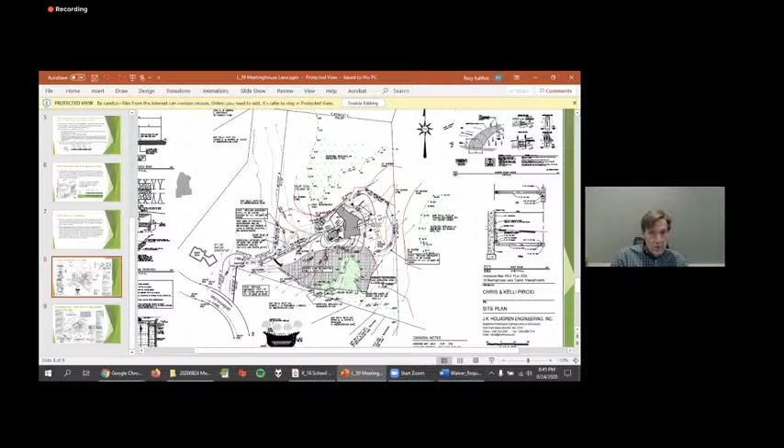So why don't we, just so we're on the record of what we're doing here, make a motion that 59 Meetinghouse Lane modifications need to be submitted as an amendment to a notice of intent. Catino, second. Roll call vote: Caulfield aye, Lundeen aye, Spady aye, Thomas aye, Catino aye. So you have your answer.

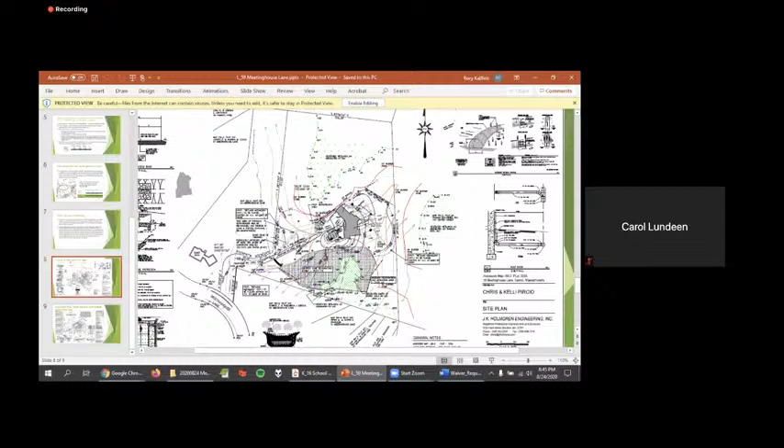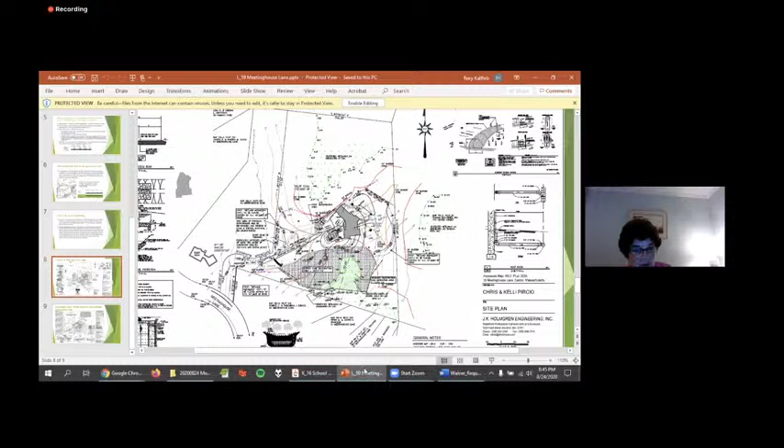Environmental planner updates—okay, I can be quick, let me share my screen. The first thing I wanted to talk about is the water treatment...